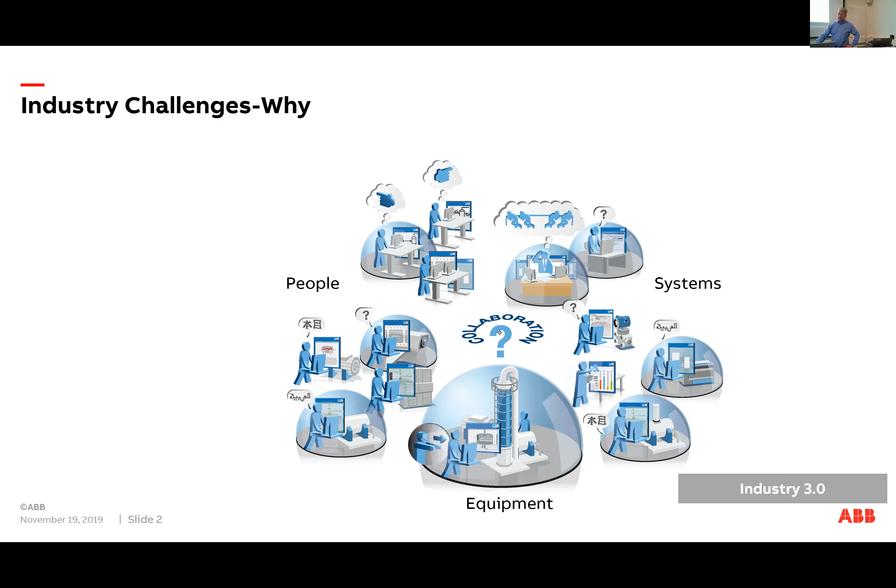And what we have seen is that what you need to get a higher level of productivity is that you need to break down these islands. To do that, you need something that connects them, so that you connect all the islands of equipment, but also the islands of systems together, so that you get one seamless environment where everything can collaborate. And then you need to give the people that work in your plant the possibility to interact with all these systems, information, and equipment. And by that, you raise the level of productivity.

And this is really good when you now go into the next generation. Try to know what is our goal with Industry 4.0, because this is what we believe is the goal with Industry 4.0 and beyond. You need to get the collaboration to a higher level, and that will continuously increase as we see in the future. The collaboration is the goal with whatever you do when it comes to digitalization.

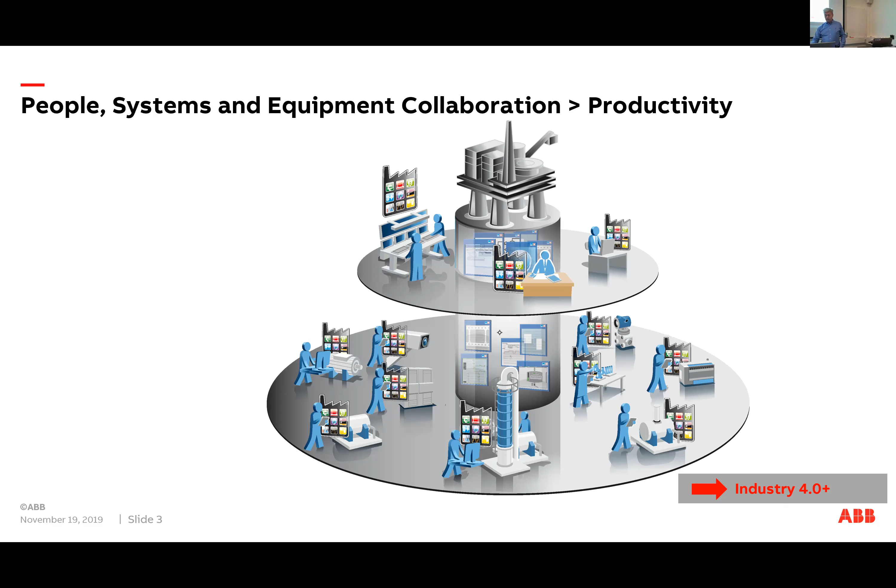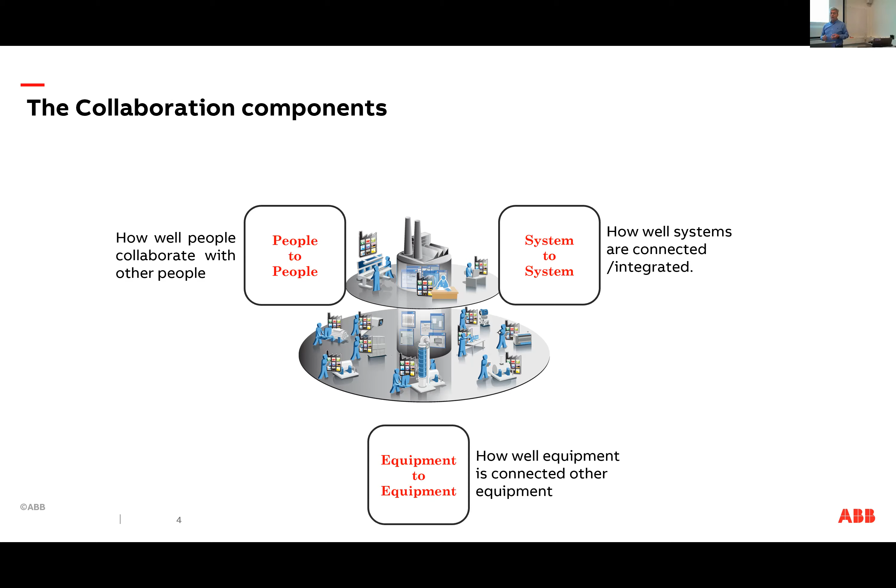And then when you take on the challenges that we see, with having a situation where we get all these new ideas of what we really need to do, you need to look at this from the perspective of how do we actually improve collaboration. You can look at that in several ways: equipment to equipment collaboration, does this initiative help in that? Or does it help people to people collaboration? Or systems to systems collaboration? Or equipment to people, system to people, or system to equipment collaboration?

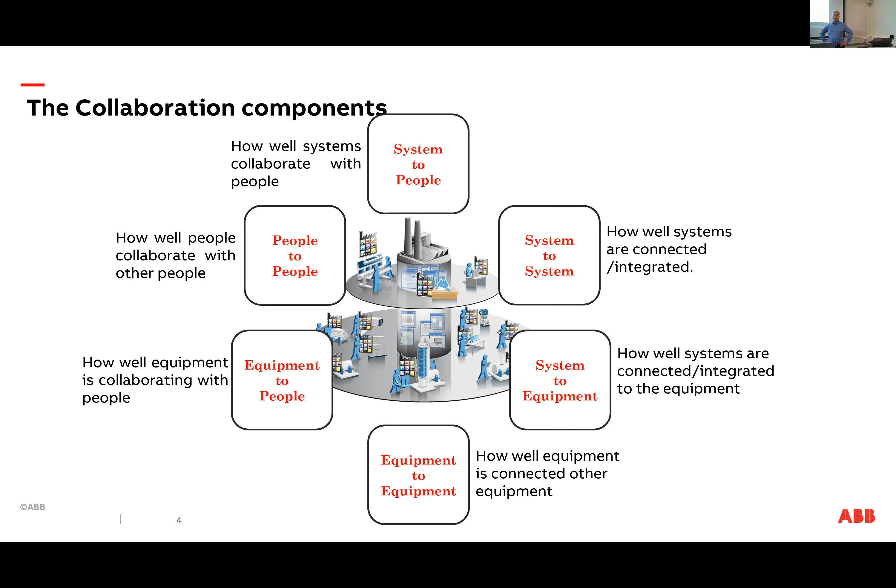If it doesn't help in any of these dimensions, then you should think twice before you get started with your digitalization journey. There's a lot of initiatives taken in the industry today that really doesn't go in any of these directions. It's just sort of trying to take some of the technologies and go with them.

If you take this to another angle and try to see what your company's strengths are, you can make some investigations. How good are we in all these dimensions? You plot them and can see where we have a strength and where we have a weakness. You can compare yourself with other companies in your business and see how you're doing, where you're weak and where you're strong. Based on that, you can start taking decisions on where we should actually go first.

This is very important now when you get all these new technologies and new suggestions for sales, from salespeople, from research, from everywhere, saying go with this, go with this, go with this. Try to figure out what should really be our goal.

If you look at these new technologies, there's also this new Industry 4.0 initiative that was started in Germany, where they say the thing with Industry 4.0 is that you get this kind of change in the industry. On a high level, you go from a situation where you have the automation pyramid, and they say that will disappear in the future. What does that really mean?

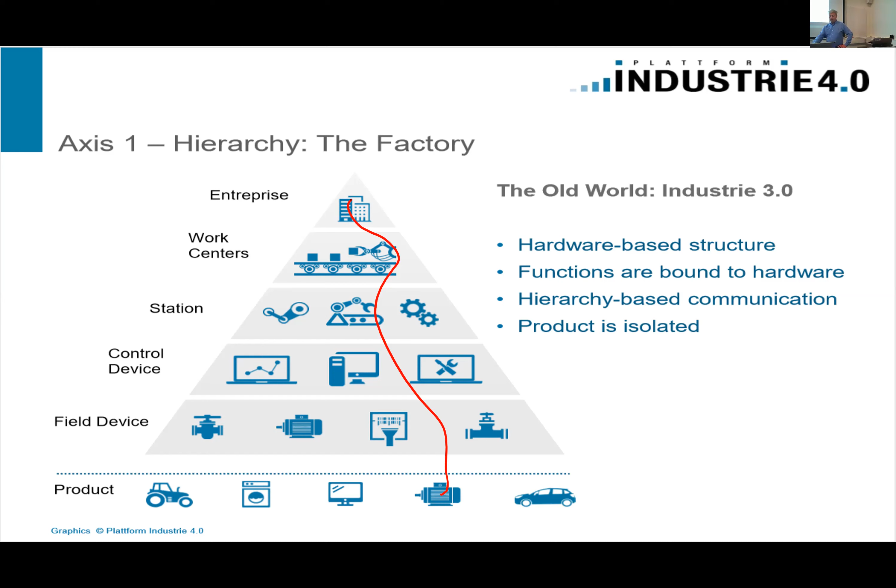The other thing they talk about is that these layers will go away. Because if this motor is going to talk to my enterprise system, it needs to go through a lot of layers, and all these layers have to support the standards needed for me to communicate and maybe tell my maintenance system or purchase system that I need a new bearing in the motor. It's very cumbersome to get this communication to work.

These are things that will change in Industry 4.0. Everything should be able to talk to everything without borders, so it should be enough to implement the functionality here and here to actually talk between the systems. So it will be much more efficient.

You'll also have a situation where if I need more horsepower for the motor, the only thing that will happen is that I'll download the horsepower, just like what you do in a modern Scania truck today. You press a button in the truck and get the new settings for your motor, gaining extra horsepower. You don't have to exchange the motor. That's the way we think things will work in the future.

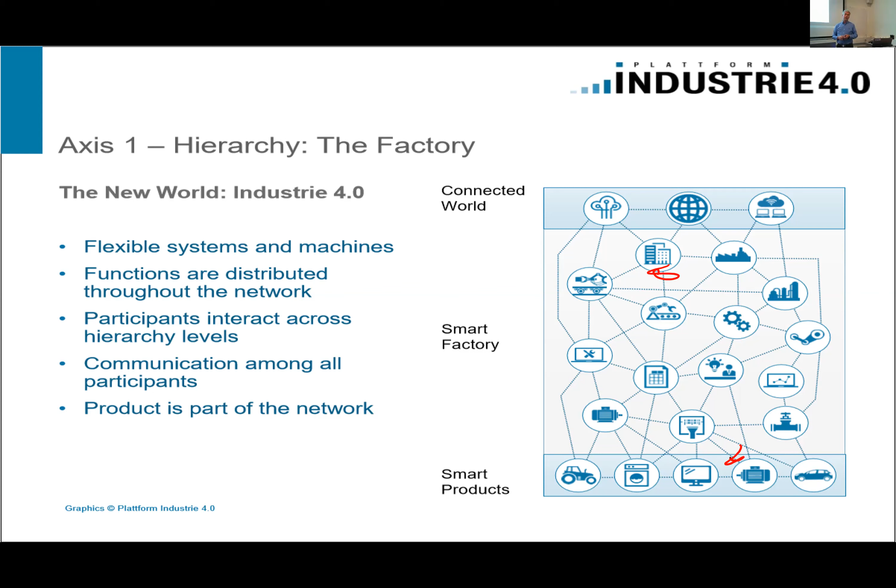This is also a big benefit for the Scania truck manufacturers. They can have the same motor and get a lot of different levels of horsepower with the same motor. So it's less cost because you don't have to have so many models, and you get basically the same revenue. It's an interesting finding.

There's a lot of other things going on, like talk about digital twins and IoT. The typical way to talk about that is that you have the physical device, and you should have some kind of software model of the same device in the software environment, typically in the cloud. Then you have an app from which you can operate this device. That's what you get when you buy one of your smart lamps at home. But this is also what you'll get more and more in the industry, as we see it.

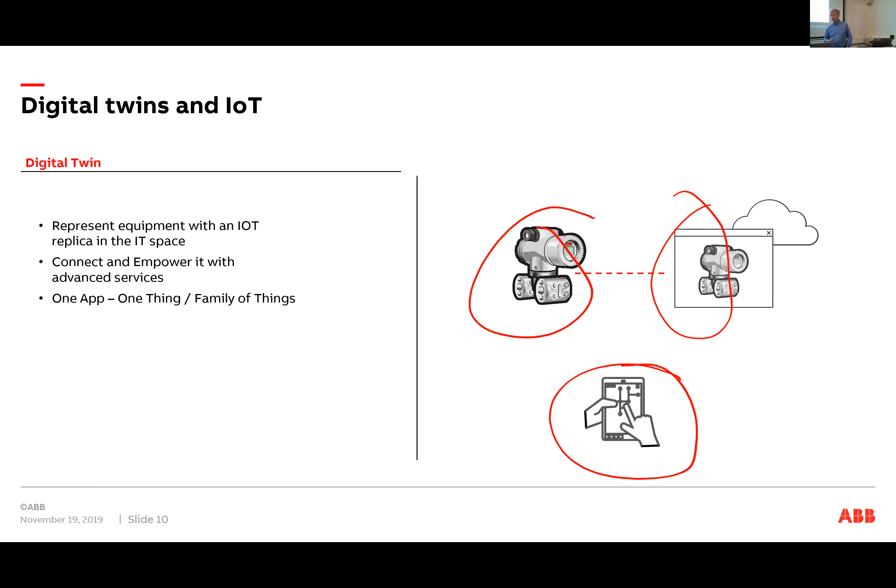One of the problems in the industry is that you have one app for everything you buy, and certainly when you buy from different vendors, you get another app. It's cumbersome when you have 100,000 pieces of equipment in a plant—it will be very, very hard to actually operate the plant. So why does everyone now start making these IoT products? Why are we going for that? Why do you think Philips is making smart lamps?

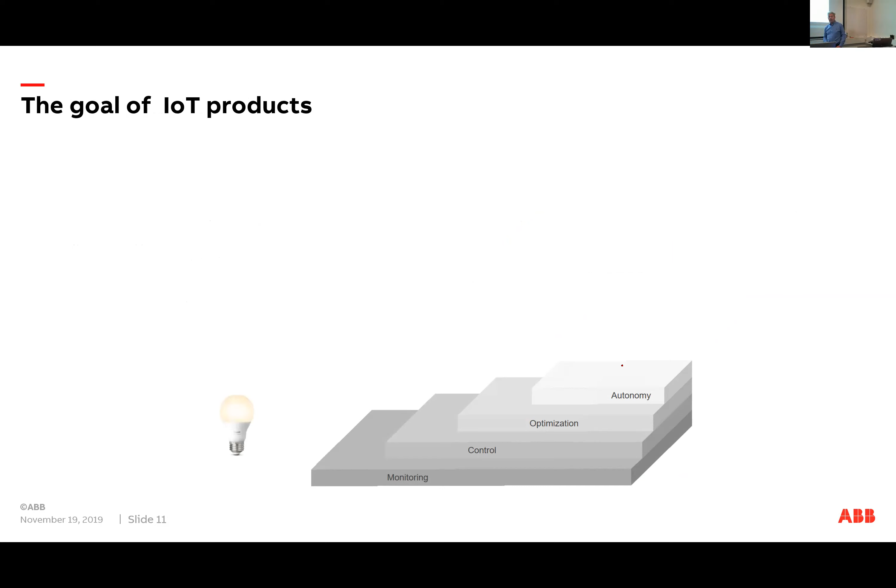Typically, you talk about several levels of progress when you build an IoT product. Take the smart lamp. The first level is what you'd call monitoring functions, meaning that in your app you can actually monitor what is going on. Is the lamp on or off?

The next level is when you can control it. You can switch the lamp on and off from your app, or switch colors. The next level is optimization, where you can tell the lamp that, okay, at 8 o'clock in the evening you turn on, and 8 o'clock in the morning you turn off. This sort of optimization. But what everybody is working on is to try to get the autonomous lamp.

But why do we do that? Why does Philips spend a lot of money making smart lamps? Well, typically what you want to do when you have a product is sell it. And what they see is that it gives them increased competitiveness. They really are able to sell lamps also in the future if they are smart.

If you think about that as a reason to make your products smart, then you can understand that this is going to happen everywhere. There's no one that wants to manufacture a product that won't sell. So this is really a strong force on the market that will bring every product, every piece of equipment, to be smart in the future. Otherwise, you will not be able to sell it.

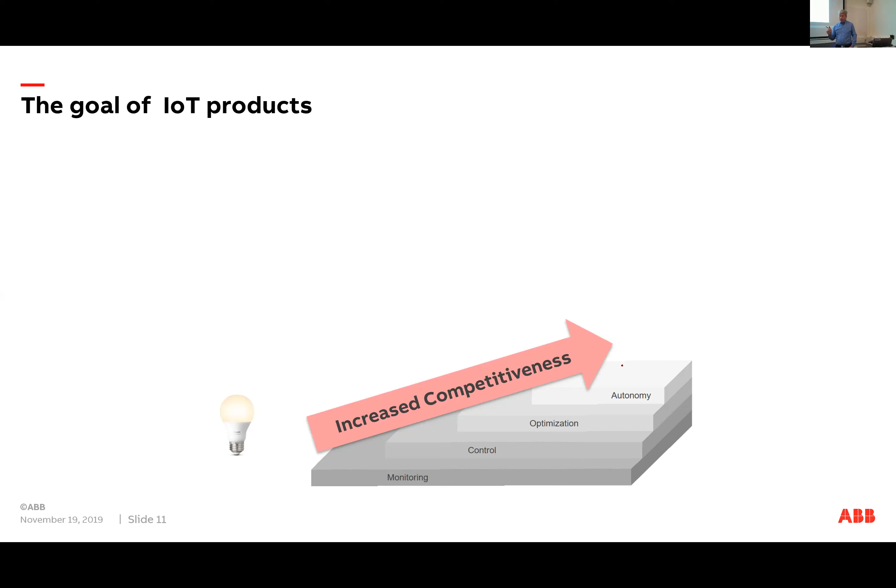A very good example of that is actually the car industry, where car manufacturers, everyone is trying to make the cars smart. But not only the car manufacturers—also other companies like Apple, Google, all these companies that know what technology to make smart things is all about, meaning software, are also entering this market because they think they are good in the technology that is needed. So this simple thing of building a car can't be that hard compared with the technology they already work with.

But the real reason why you do this is you would like to be the one that sells all the cars, because the one that creates the autonomous car believes that, okay, then we will take the car market. And it's a big market, so that's why everybody is interested.

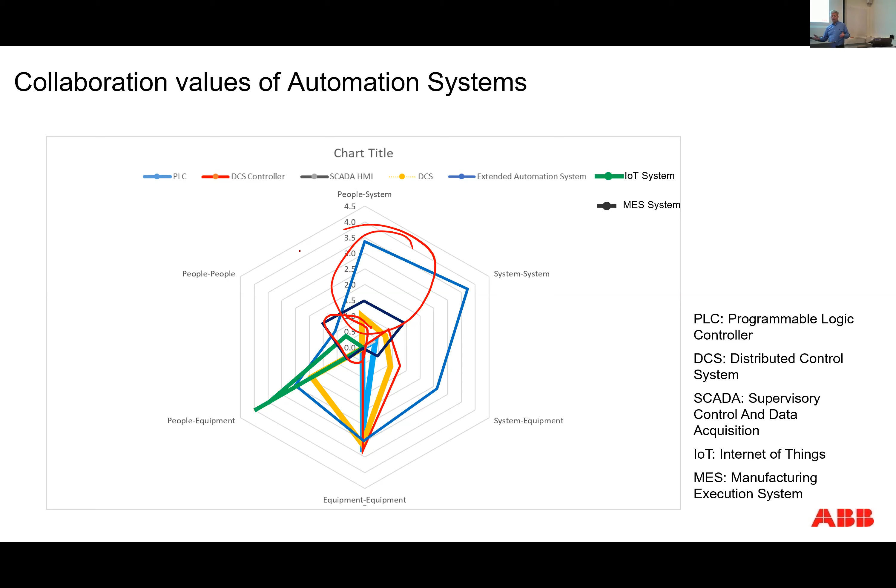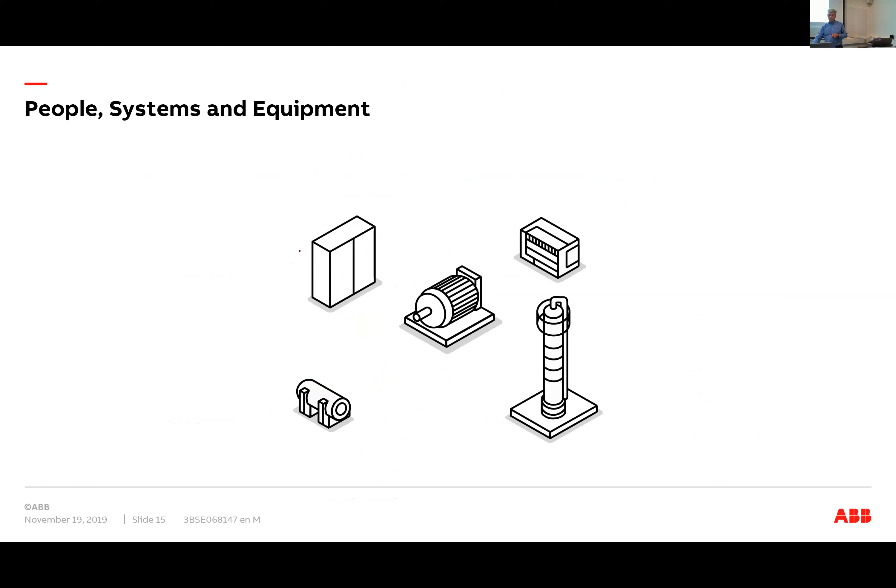Okay, but basically this has been the situation for a pretty long time in the industry, that we have been looking for ways to improve collaboration. If you look at the equipment and think about the systems you have in the industry, you can see there are a lot of different systems just having digital twins of a motor.

You have your maintenance system where you have information about the motor. You have your purchasing system with information. You have an electrical drawing. You have your control system. All these are typically systems that have different pieces of information, and they all try to have a digital twin that is consistent with what is actually happening in the plant.

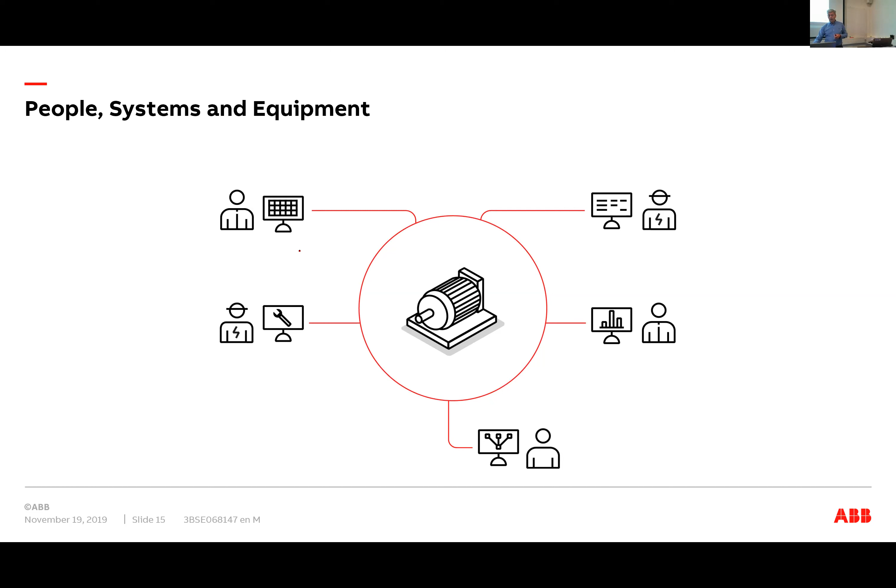Interesting today, and the result of these islands of expertise, islands of automation, islands of systems, is that different people work with different systems. If we look at this in real terms, you have a sensor and it has maybe a simulation model. In the control system, in the PLC or controller, you have a very good digital twin.

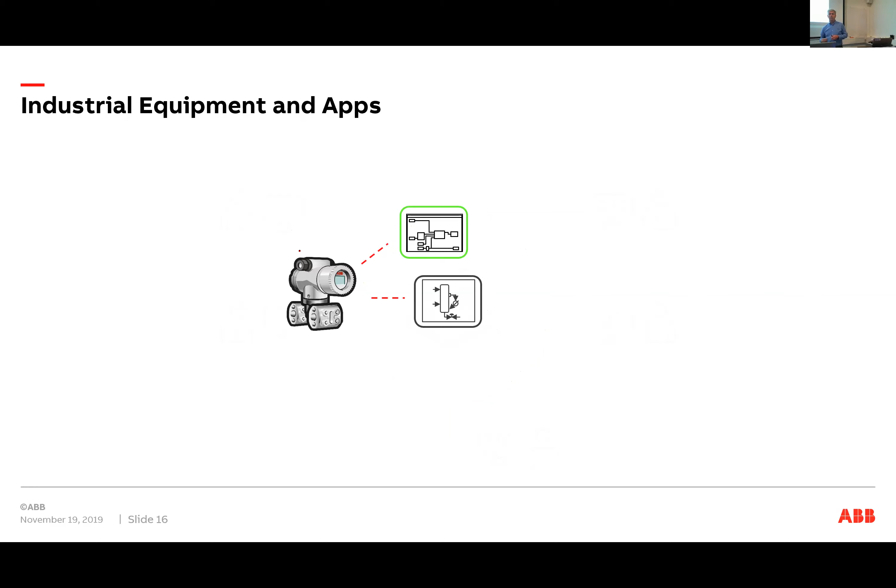Which is maybe on the millisecond level updated with what is actually happening in the plant. But there is a lot of systems that has information. One example we tend to forget when we talk about digital twins is the video surveillance system. When you have a camera that looks at a piece of equipment, inside the camera system you have a very nice digital twin of what is going on.

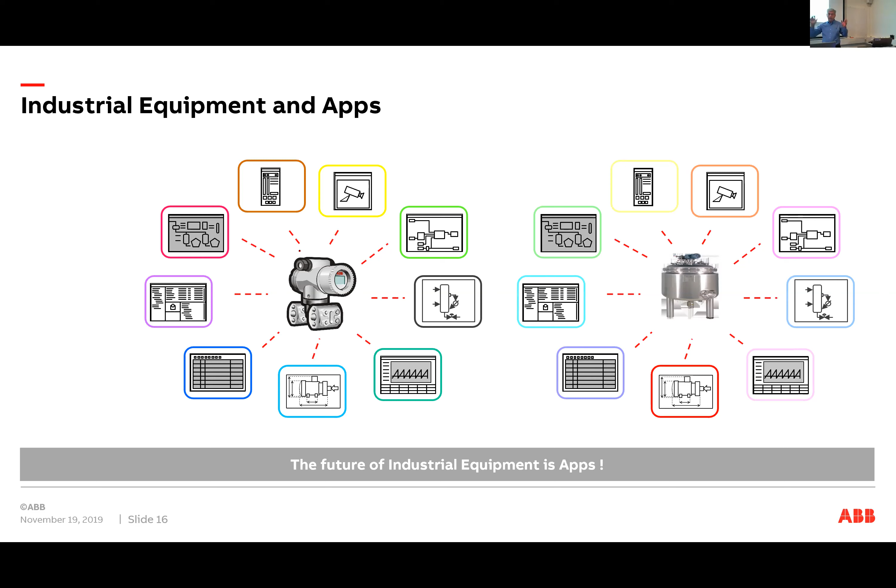So there's a lot of these digital twins spread out in systems in every industry today, and in every plant you have a lot of systems with digital twins spread around. It doesn't matter if it's single pieces of equipment or composites of equipment, it's the same situation: a lot of pieces of information really trying to build an image from a certain perspective of what is going on.

Industry 4.0 also talks about that. They've started to talk about it as you go through the life cycle of a product: it starts with the requirement for the product, the definition of the product, you manufacture the product, but then you put it out in the plant, and all the way along you actually increase the amount of information that is available in systems about the product.

And when you do that, in the end you get pieces of information in different systems, so you get the composite product which really has information in a lot of places, or at least a lot of systems. The challenge now is to get access to this information, and that's where you talk about this asset administration shell. It should be a way so that if you get to that, you can get to all the pieces of information that are relevant for this product.

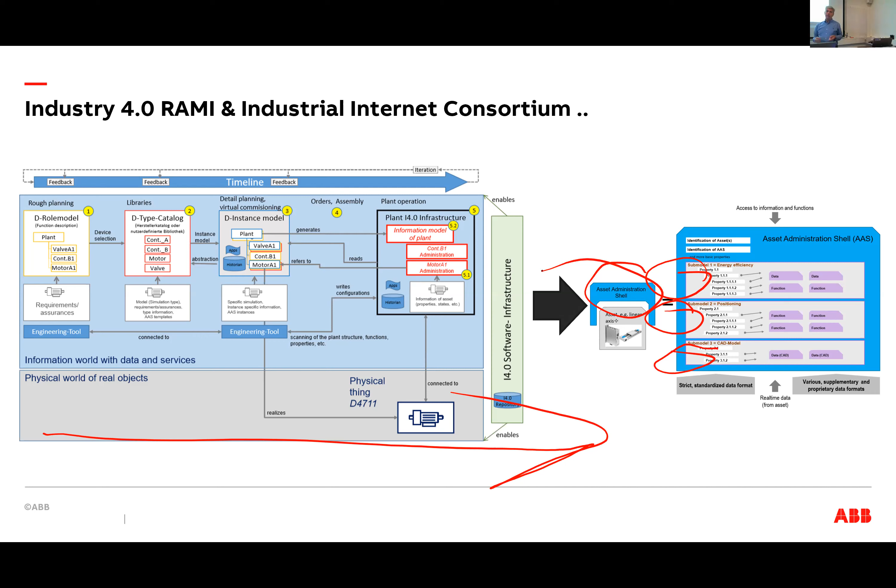In ABB, we have worked with this kind of problem for quite a long time. And we have figured out that it's a good idea to actually have this kind of container for this kind of information. So if you work with our systems today, we've gotten a head start on building this kind of infrastructure needed to actually create this collaboration, because we believe that if everybody has the same picture and very easy access to these systems, you can really increase your productivity.

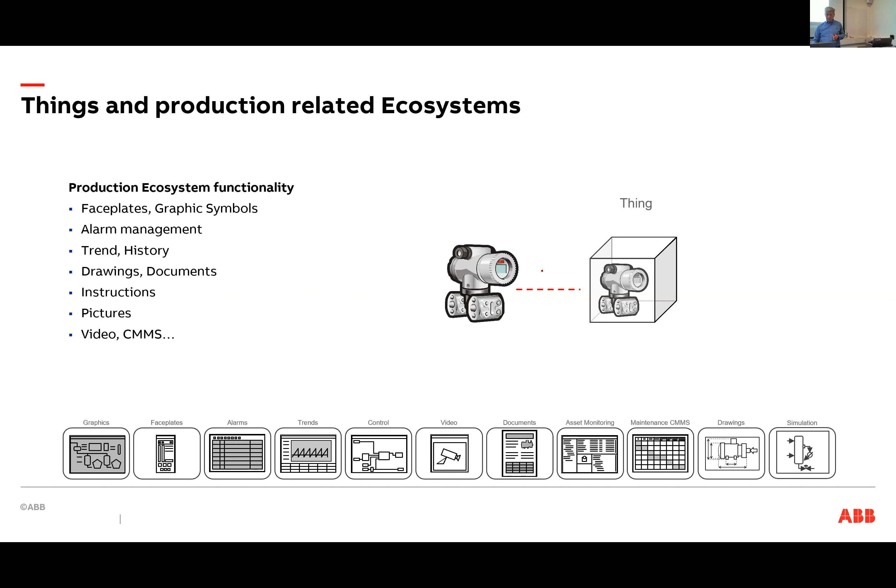So what we have is a possibility for local systems that you have in your plant. You can put them in the equipment, basically, or in the digital twin container of the thing you have out in the plant, the equipment you have in the plant. Just as they say in Industry 4.0 that the goal of Industry 4.0 is. You can already do that today, but just for local things and not yet for the IoT systems coming.

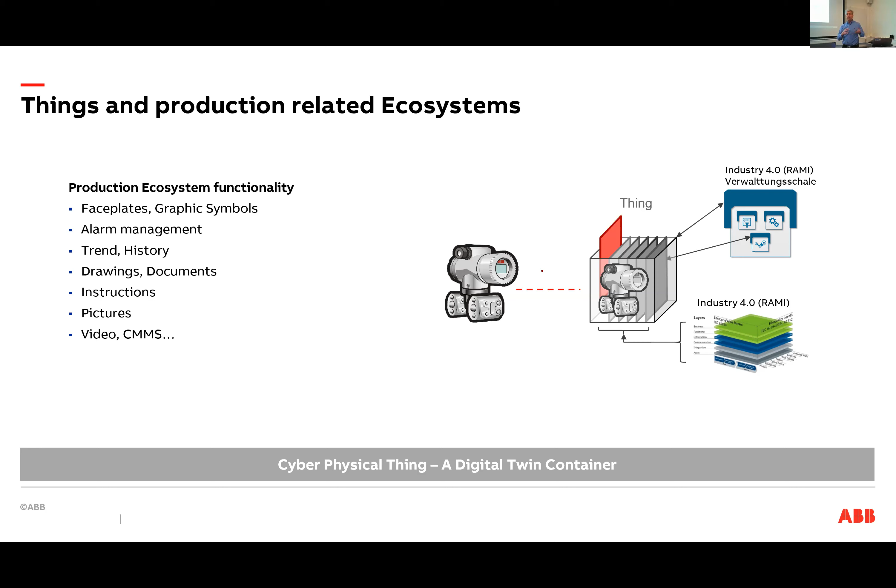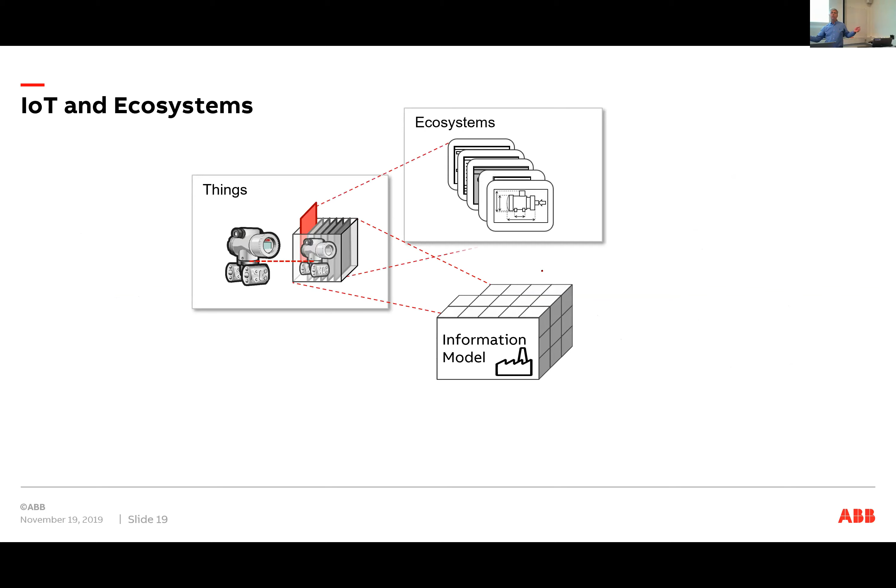But it's interesting. And really what we have done also is put this into a situation so we can build a model, an information model of the plant, which is the sum of all the models in the different systems. And this is what we use then to get people, systems, and equipment to collaborate in the best possible way.

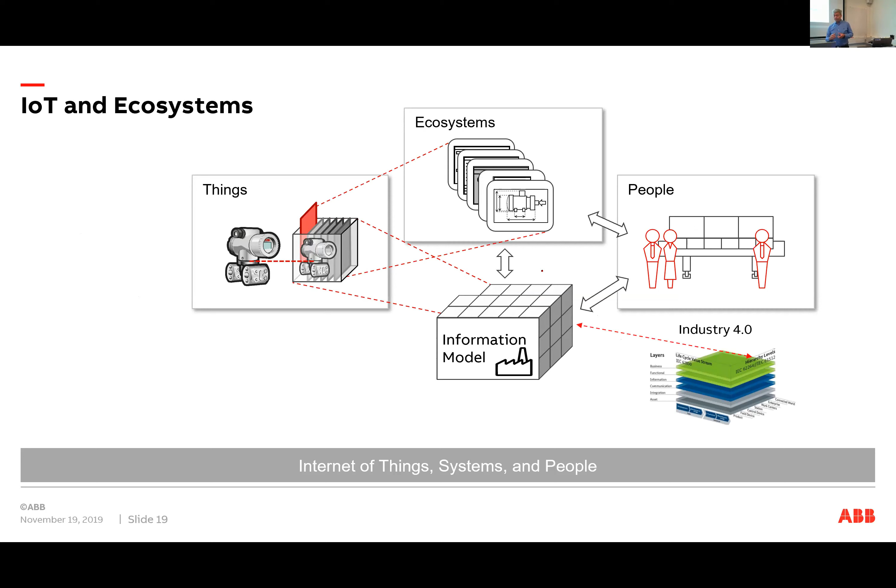So, if you already have this, what does it bring you when it comes to productivity? This is a plot of one of our customers that has a very big strategic focus on making every piece of equipment in their plant smart in the way we have actually sold to them. What happens is that, it's the Aitik mine in Boliden, they are now 10% more productive than the second best mine in the world.

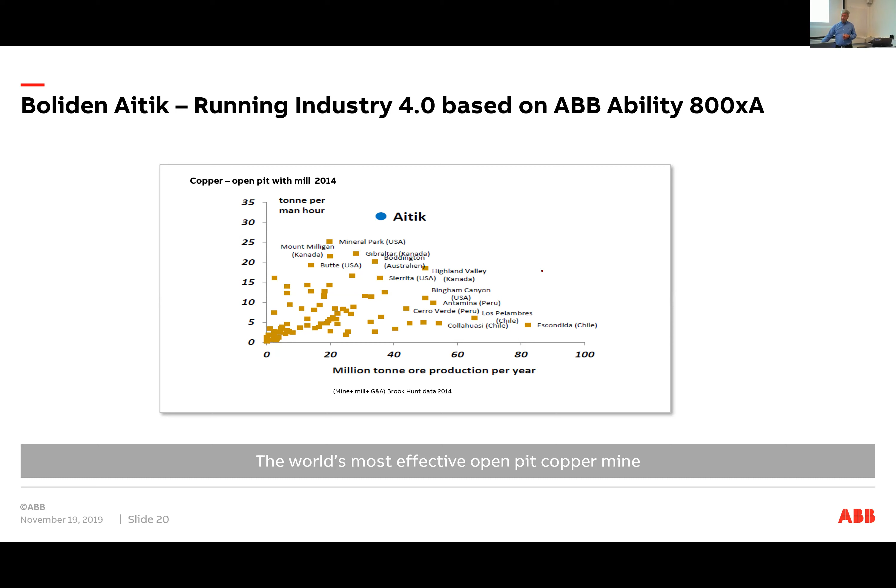So they produce 10% more copper per man hour compared with the second best. But it's interesting to know that the copper they dig out has a lower level of copper in it than any of the others. The other ones, the yellow ones here, are the other open pit mines in the world, and they have less copper in the ore than all of them. But still they get 10% more copper out of the plant per man hour. So it really gives you a big benefit to go for this kind of digitalization. What they have done is take all their systems and plugged them in to make the equipment smart.

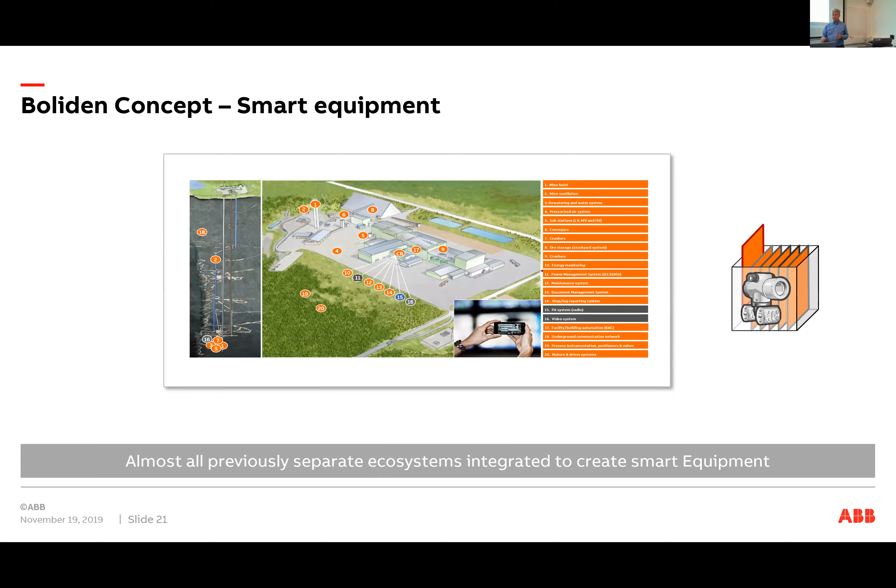What is happening now is we take the next step. Now we have worked with on-prem systems, local systems in the site. The next thing is systems in the cloud, systems out on the internet, systems within the manufacturings, the product makers' systems, etc. So the next thing is that we can actually bring them in to make the equipment even smarter, which will also improve productivity.

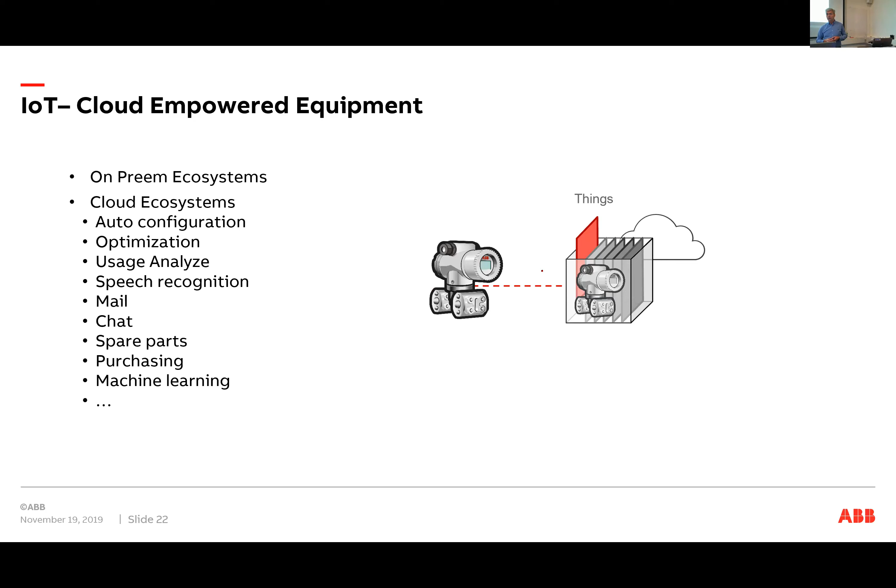So we will really get Industry 4.0 when all the systems that have ever been involved in your product are connected into one seamless environment where they collaborate and bring the most out of the product to the user. This is how we see the future of the industry when it comes to how systems will be built and how products will get smart.

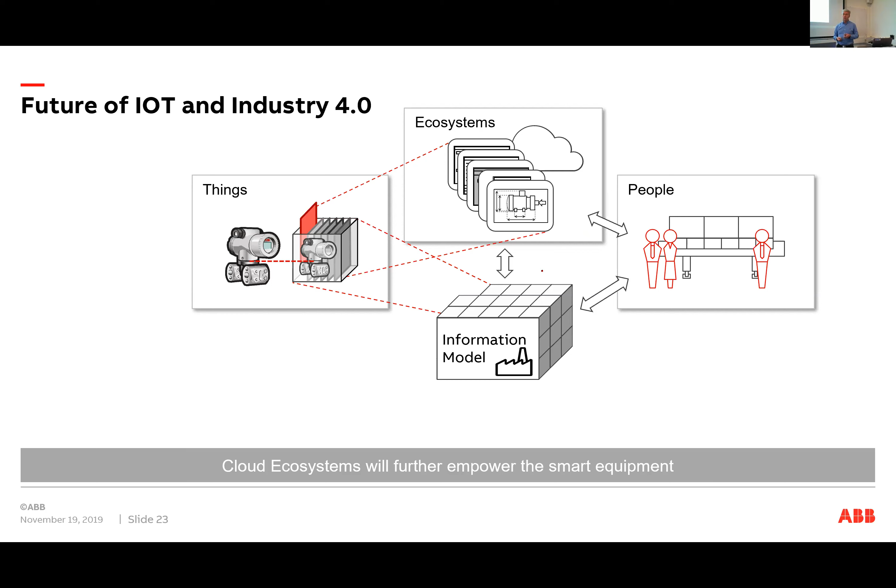So the future of a plant is that you will have a lot of IoT systems, but you'll also have one of the enabling technologies people are talking a lot about today: 5G. Why is 5G so important? Because that's the only way you can build a piece of equipment without involving the plant owner to get connected to the cloud.

So you can't really make the equipment as smart as you'd like without being able to connect it to the cloud, without telling your customer they have to deal with all this networking setup. So 5G is really an enabler for smart equipment and smart products. That's why it's so important to get 5G out there, because then you can start building smart products and smart equipment.

So what will happen is you will have 5G, and that will connect all the products to the cloud. When you get the product, you get full functionality immediately, because it's connected to the cloud you can utilize the functions in the cloud. But when you buy your product, you'll also get the local operation possibilities, so you can run the product as is with local panels but always have full functionality.

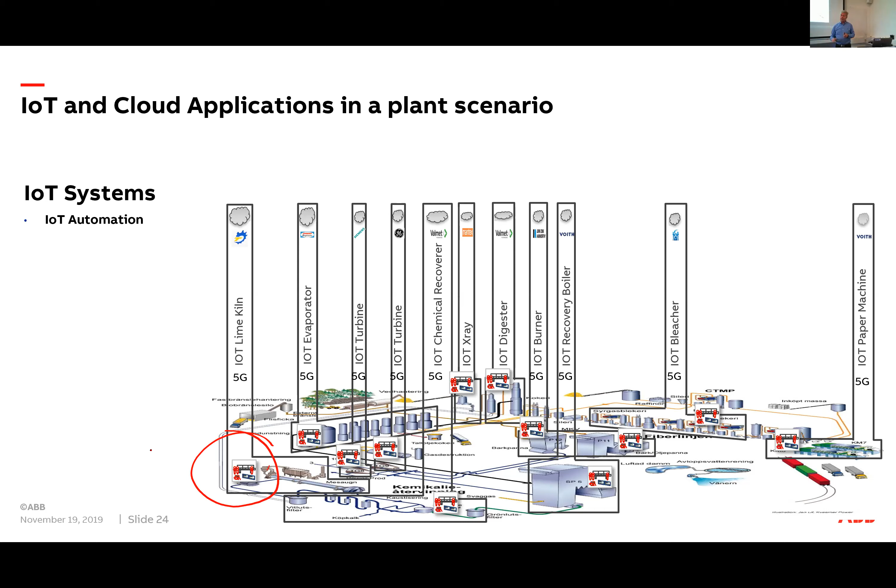Next, manufacturers would like to sell the product as a service, and when they do, they also need to operate the product. So the manufacturer will have their own control rooms where they control the whole fleet of their products, making them actually learn as we go and learn from other product installations to be the best on the market.

And then, of course, you need to collaborate. So you will have IoT collaboration systems that make one product collaborate with another, but it has to take the scope of all the different functions. You have to collaborate on the local level, but also collaborate on the cloud level with functionalities in the cloud.

This is really the view of the future industrial landscape that we are going to get to in 10, 20, 25 years or so. And the collaboration doesn't stop within company borders—we will go over company borders. We'll have the same kind of collaboration because it's all networked, so it's no problem; it's just a matter of solving the technical issues, and doing that in a safe way.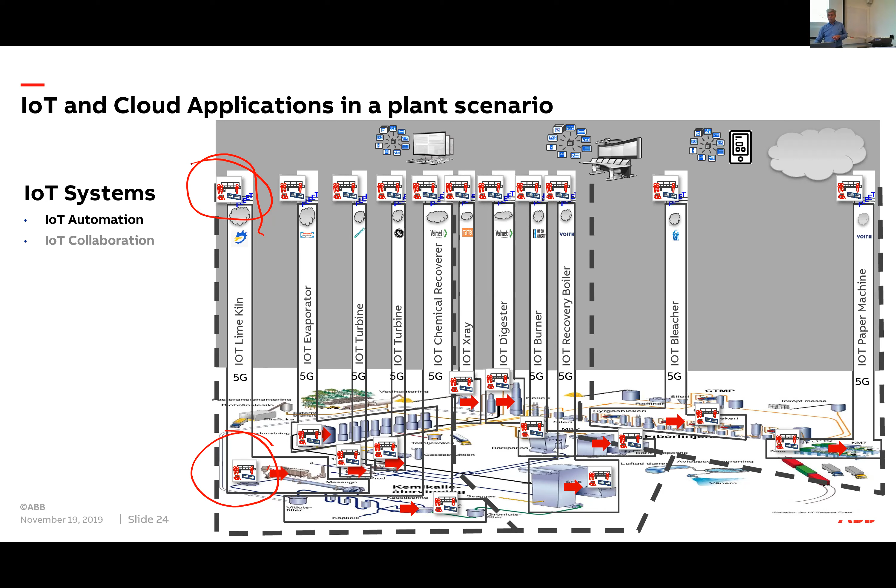But the thing we are after is to improve the collaboration between people, systems, and equipment. So with that, thank you very much. Thank you.

We want... I'm just no. Please, you please stand there. I just wanted to—I need to get this first. I think there are some questions maybe from the audience.

There's one question, not related to the details of connectivity. My observation is that when you have different commercial partners collaborating in the traditional business model today, you normally end up with the strongest player setting the rules of the game, and quite often keeping information secret for their own benefit. This model sort of assumes it opens up for more or less information flow.

That needs to be managed, I guess—otherwise you risk losing that openness. I think one of the hindrances we see today is that all the vendors trying to build IoT systems try to be the only one, expecting everybody else to connect into their system. But the open market doesn't work like that. You have to build an infrastructure where you can freely collaborate, cooperate and compete. You need a competitive landscape to bring the best out of all products. You can't have a situation where I connect my product into an ecosystem and become dependent on the one who built it to give me the possibility to build the best product.

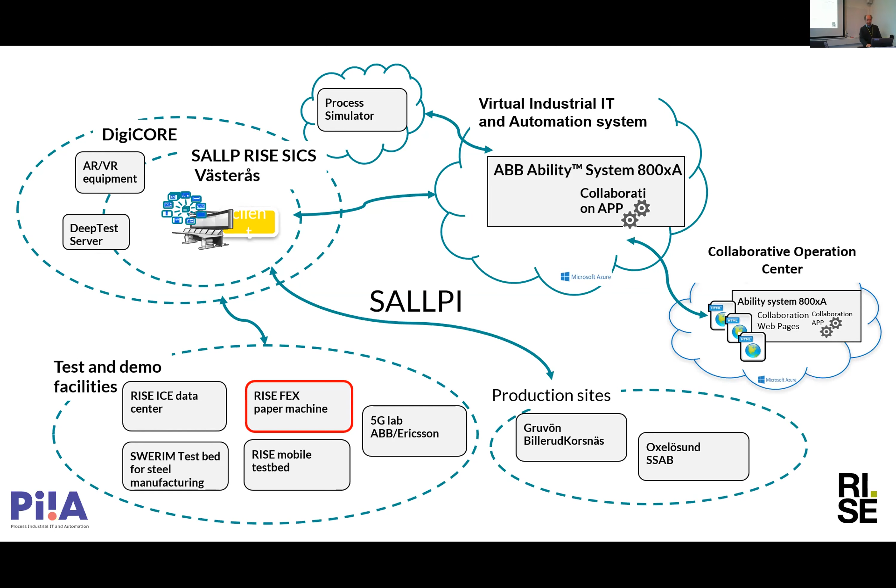They expect immediate feedback on what they're doing. They're used to communicating through social media and have a huge network with people everywhere, helping each other, talking to each other. My daughter has two mobiles, talking with her friends on one and playing on the other, for example.

I believe when I wrote this, I thought, well, this must be then in the future some support of self-learning, or no, that's not a good word, some kind of teaching environment for the operators. Then I came up with this tutoring, that you kind of help each other, coach each other in order to make things better. And I believe that is how you then, in the future, will promote development of competence. This knowledge exchange will be a very important part for the future operators.

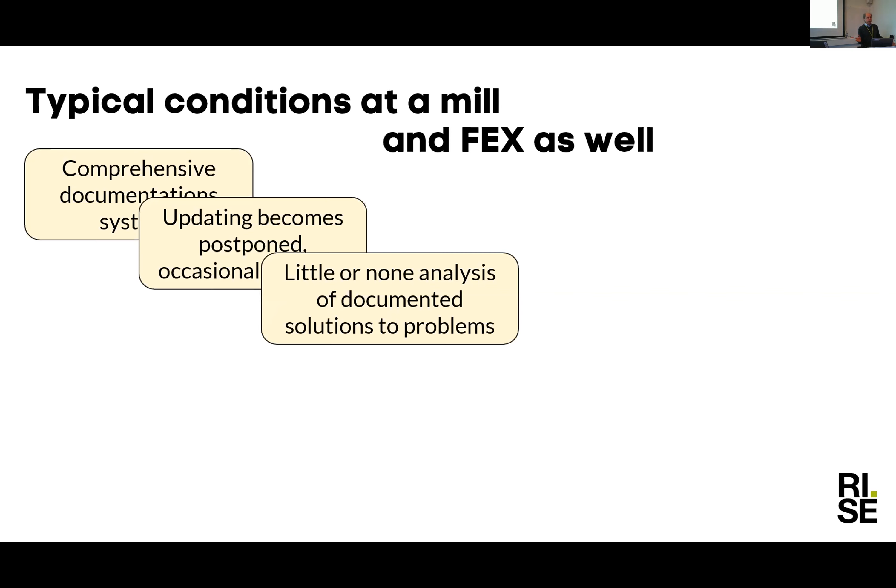Well, many things to attend to in the industry, so updated information might be postponed or absent at times. And if you're in that situation, there's even less time to analyze what you have in your system, if you don't do it automatically or somehow. So you have documented solutions, but you're not really aware of them, which makes it more difficult for knowledge transfer, because you have to experience things in order to learn them.

So there's no really systematic process in knowledge transfer. What's happening is that you pair up experienced people with newly employed people for them to learn how to do things, how to operate the process.

So what could the future bring here? Well, I think this tutoring process operation would be one thing, where we have, for example, tested augmented reality here at FEX. By that, we can overlay information that's linked to an object while doing things, while working with things. You can have a communication that supports acting remotely, for experts in other countries or with a colleague somewhere else in the mill.

And you may interact with the instructions, and by that also become some kind of automated documentation of what you have been doing, the sequence, and what effect it had. So in that sense, you get immediate feedback on what you're doing, and you can compare that with what has been done before to see if this was better or worse, if you performed well or not. And that will push you to do better. This kind of tutoring operation.

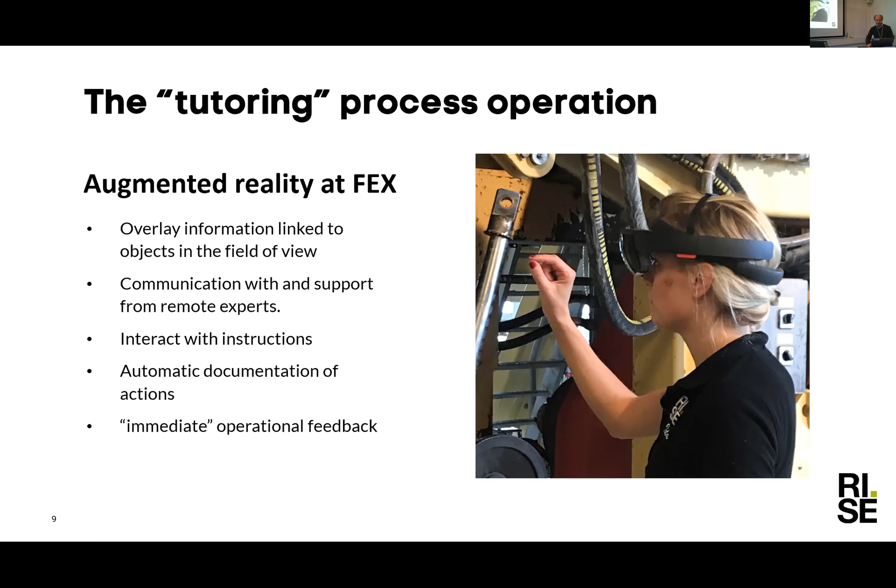Perhaps an even more visionary opportunity with digitalization is what I call data-driven coordination. We had Mikael from ABB talking about what you can do in a mill, and they ended with, of course, that is not enough. You have to collaborate between different kinds of factories and so on as well.

And that is what this is about: that you have information, and not just a digital twin of the mill or a factory, but you connect it to what you're doing as well, to the material you're producing. So you can combine information with the material and package that to your customer, so they can make their process even more efficient. So you cooperate in the value chain in that sense.

For doing that, you have to classify the functionality of your product, not just sell it by weight or thickness or something like that, but by how it acts in the next phase in the value chain. And this digital twin then has to be linked. You need to know where the products are in the converting process, in the next step, in order to bring up the information and utilize it.

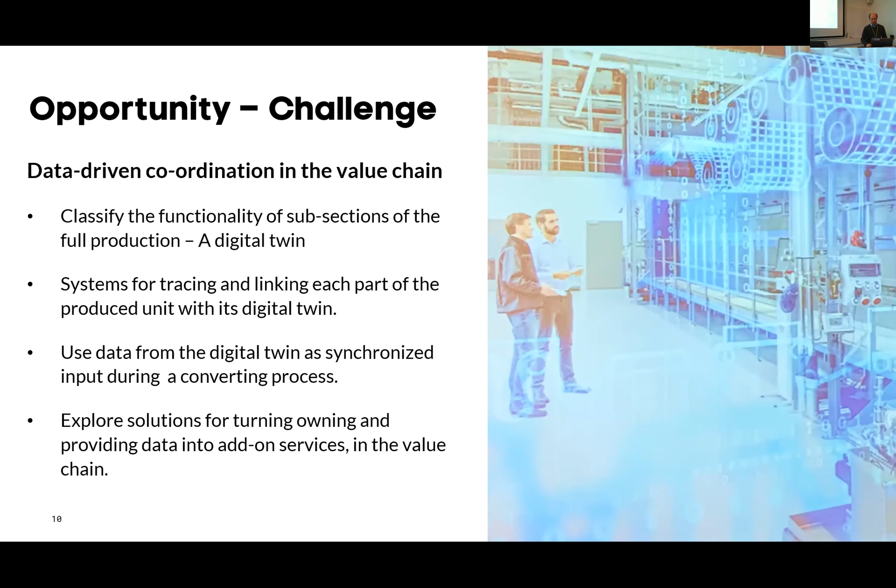So this is a vision, and we're starting to walk this path. I mean, this won't happen overnight. It's a process, and we've started this. This is an example, the project OVAPPO, also financed by Vinnova, where we use information available in a mill.

The problem is that when you do quality measurements for the paper produced, it's only a very small part of the paper that you actually characterize. But we expand it. We use an IR camera to get a map, and then we expand the information from the quality system to cover the whole produced product. By that, we can use this map of the product as a starting point for our digital twin of the material produced. And then, of course, synchronize it with when it was produced in the machine, and you can build this package of information.

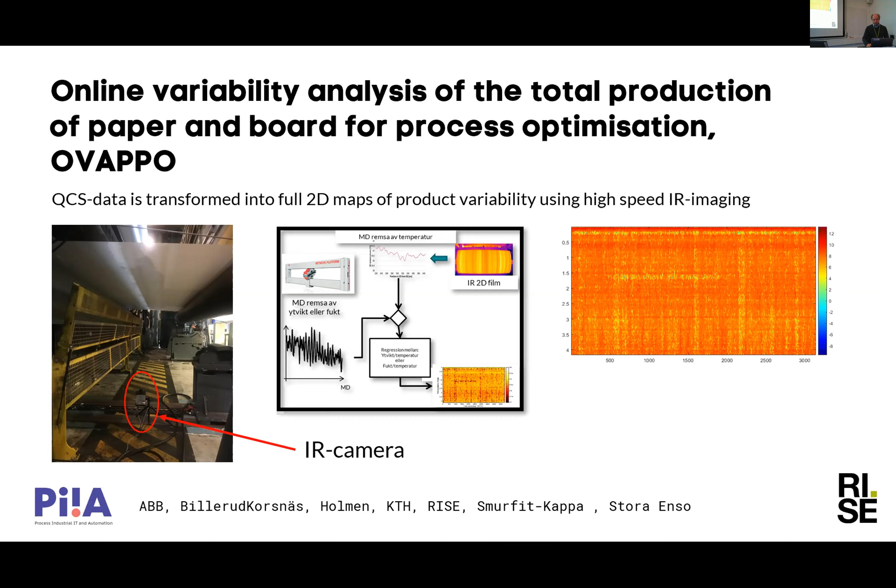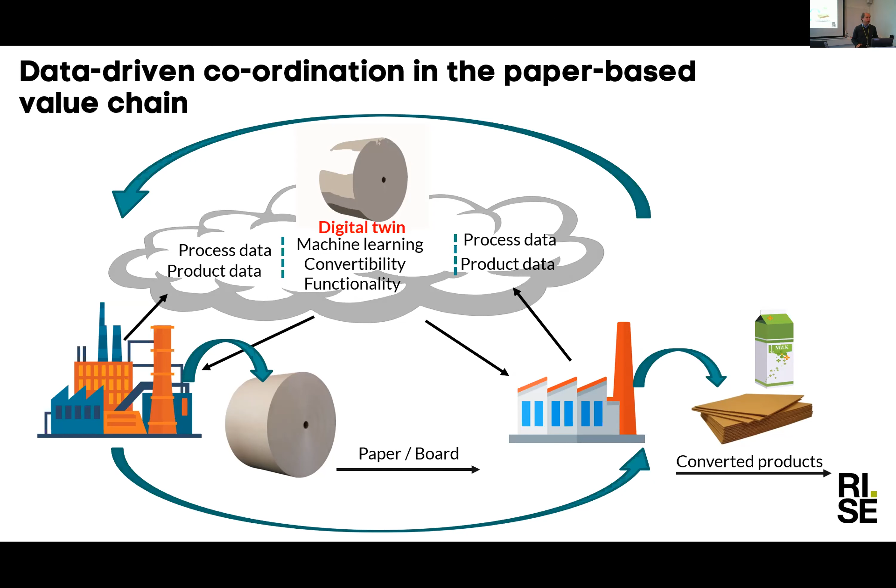So this digital twin of your paper, how it's made, you can use that together with the physical products in the value chain. Then you combine the product data and process data and do machine learning for different industries in the value chains to cooperate with each other. Instead of making the strongest paper at a certain rate, you can adapt so that you produce paper that is easily converted by a customer. The customer could use information to do this converting even more efficiently. I believe this is feed forward but also feedback - information needs to go in both directions. So companies cooperate to help each other make their products better. 1 + 1 becomes 3, or at least 2.5.

These are examples of how we could use paper making facilities, or the FEX infrastructure we have here at RISE. We can use our pilot machine, take up information and data on how the machine was run, and use information on how it performed, what kind of activities the operator did during this process. We can use characterization, this mapping of the material, and synchronize it with the production process, combine that and package it to test how the product will convert. How can information from the making process be combined with information from the converting process, so we manage the data, structure it for availability and collaboration, put operational support into this, and make some kind of coordinated production through the value chain, demonstrating how this could be done piece by piece.

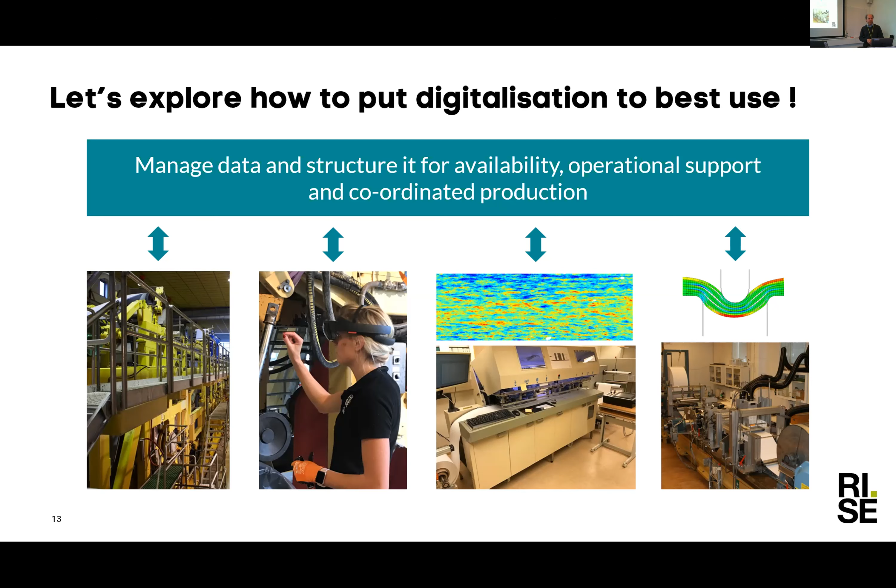So that is the first step in this process, the digitalization process. Thank you very much.

So, are there any questions for Peter? Walk the talk - how far are we from walking the talk?

I mean, you're talking about the paper industry, and the pilot machine we have here. When I think about what Mikael talked about with 5G and the cloud and all of that, it really expands your imagination of what you could do, doesn't it? Yeah, and you have to walk the talk. You have to take it step by step, of course. And doing that, you have to have the courage to start walking as well. I believe that is one of the things we can do here, to show what is possible and show different ways of doing it, to inspire the industry to start this walking.

But I have this idea that the industry is kind of hesitant in moving into this area, the industry we're talking about when we discuss paper making. Is that true, Mikael? Yeah, I would say that in general, yes, but we have some interesting customers coming along wanting to run everything in the cloud and things like that. So it's coming there. I'm agreeing with you as well.